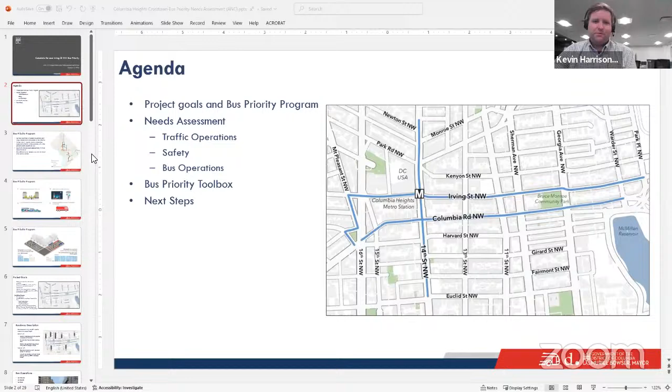But to start with, the bus priority program is something that has grown out of long range planning in the District of Columbia. moveDC, which is our long range transportation plan, identified many corridors within the district, about 70 miles altogether, where there's heavy transit ridership. My team's job is to implement projects that will make transit work better on all of those corridors to improve travel time and reliability.

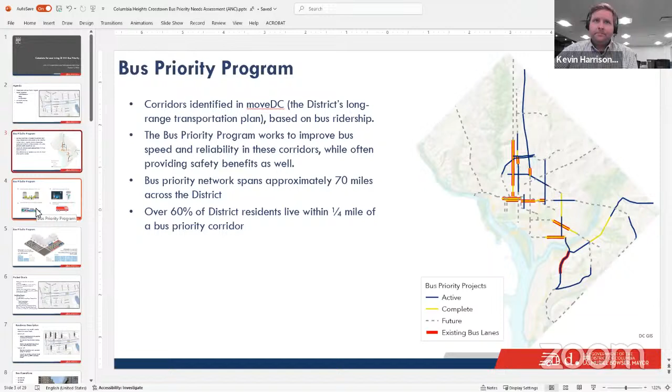And the reason we do this isn't just because we love buses. It's about helping the people who ride those buses so they can spend more time with their loved ones, spend less time waiting for the bus, travel and reach more destinations, make their life more convenient. And also, it can help emergency vehicles respond to emergencies.

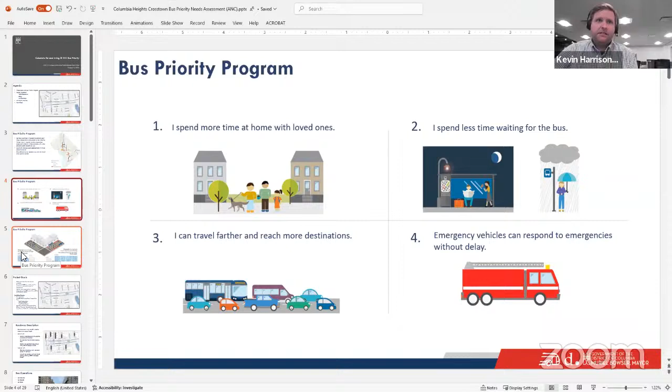Another element of this is that many of our streets are very congested and at capacity in terms of fitting cars. There are bus priority interventions we can do that allow a lot more people to move more freely and more conveniently. This is a way that we can get more out of our transportation system and provide affordability and convenience for residents.

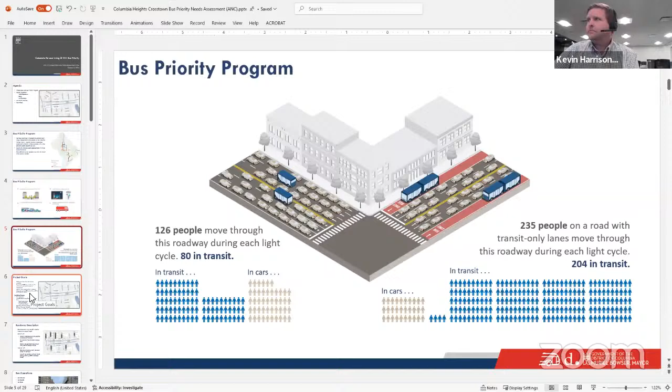Some of the main goals of this project are most notably to reduce bus travel time and improve reliability. We're focused on the bus priority element of this project. Another major part of it is evaluating the 14th Street bus priority project that was completed in 2020.

Work was done in that project in the first year of the pandemic, and it was difficult to evaluate for a long time because travel patterns had changed, and it was hard to know what was going to be happening in the future in terms of travel patterns. But now that traffic volumes have stabilized and returned to previous levels, we want to get further into evaluating that project and see how it's working.

The limits for the project are 14th Street and also Irving Street, from on the west end, Columbia Road, where buses start to make this connection over to Irving Street via Harvard Street and Mount Pleasant Street. We want to make sure that we cover that with this project as well.

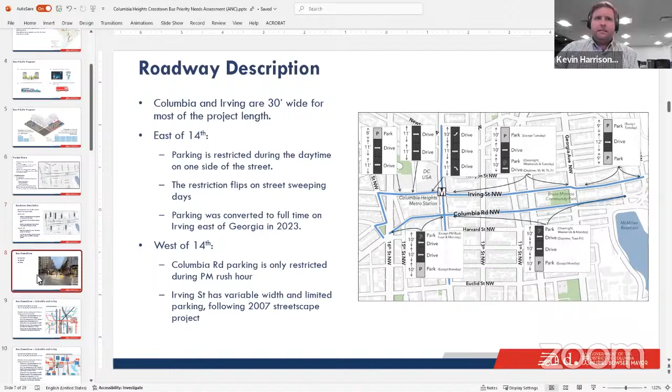And then switching gears to talk a little bit about some of the bus operations in the area. I wanted to talk some about the bus network, the bus speeds through the area, and then also some of the bus stops and bus stop locations.

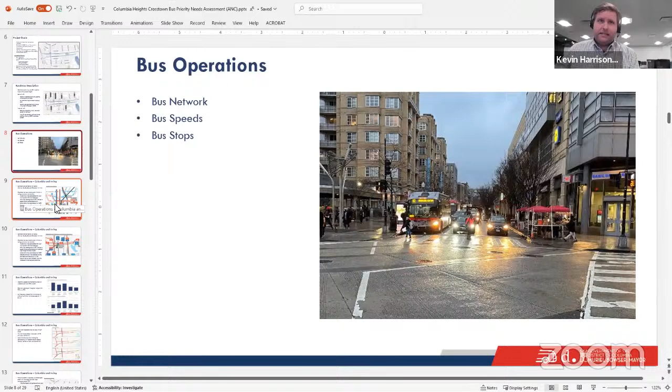With the network, one of the major things I wanted to touch on is the bus network redesign that's happening right now, that WMATA is leading, the Washington Metropolitan Area Transit Authority. It's not a DDOT project, but we're an important partner in that process. And just want to note that in this area, there are some changes to the bus network.

The H2 and the H4 are kind of the main routes that continue all the way down Irving and Columbia through this corridor. But then there are also segments that have the H8. The 42 and 43 make that jog on Harvard Street up to Mount Pleasant. And then, of course, the circulator, where the service is ending.

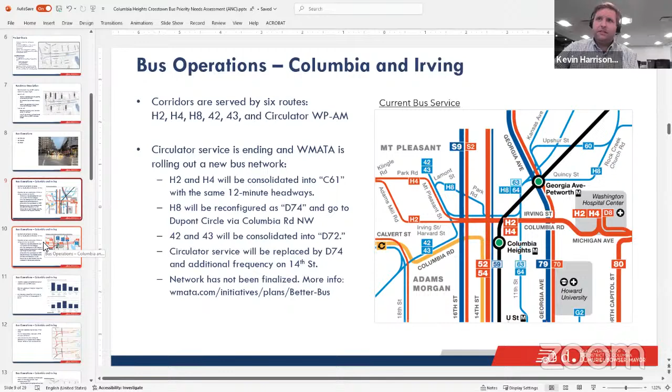So the H2 and H4, I'll switch over to just a snapshot of the new network. Also note that their network's not finalized, but right now this is what they're proposing to roll out in July of 2025. So the H2 and H4 are going to be consolidated into the C61, which will have about the same headways as it currently does.

The H8 will be reconfigured as the D74, and it's actually going to be extended to go from Brookland to Petworth, which the H8 currently does, and then it's going to continue down to Dupont Circle and Farragut Square via Columbia Road.

So the H8 is effectively going to just keep going west. It's not going to do the loop through Mount Pleasant anymore. It'll just go straight down Columbia and Irving.

The 42 and 43 are going to be consolidated into the D72. And then the circulator service will be replaced by that D74 that I mentioned. That'll provide service along Columbia Road into Columbia Heights, and also additional service on 14th Street.

And again, this is WMATA's plan. There's a URL here to learn more about what they're proposing, and I encourage everybody to stay engaged in that process.

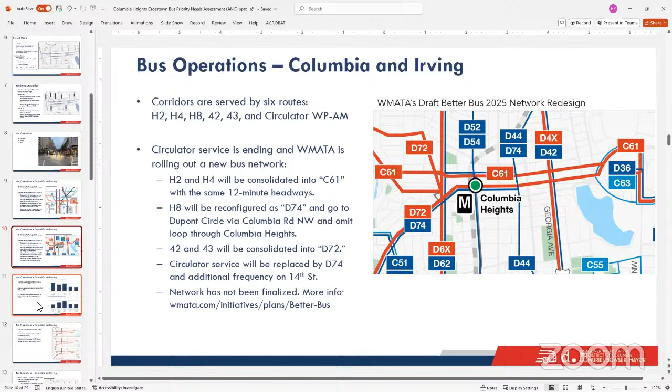Thanks, and I was just gonna try and move a little bit faster. I'm going very slowly, so my apologies. So I was gonna touch on the ridership.

It's generally higher where there's more service, west of 14th Street. And so you can kind of see here the different routes that serve the different segments of the corridors and how correspondingly the number of passengers on board buses tapers off as you move east. It ranges from about 700 to 1,700 passengers. Ridership on the WMATA routes is about 90% of where it was pre-pandemic.

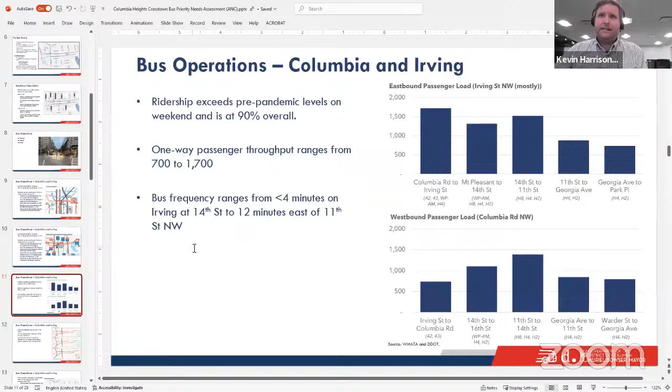And the frequency ranges from less than 4 minutes, so that's around Irving and 14th, there will be a bus every 4 minutes. But farther east on the corridor, it's every 12 minutes or so, where it's just the H2 and H4.

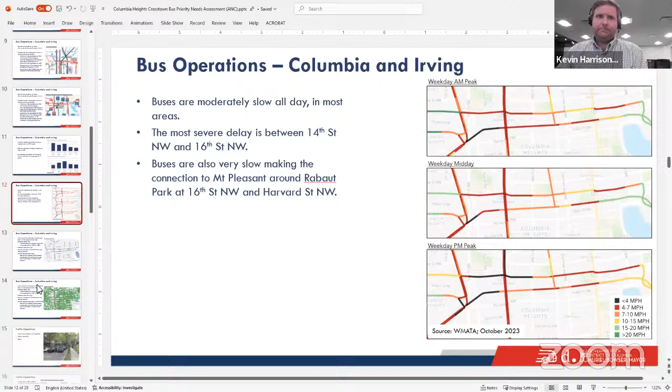WMATA's bus stop spacing guidelines and the preferred spacing for local bus service is 4 or 5 stops per mile, which works out to about 1,060 to 1,320 feet between bus stops.

The other thing I was going to point out is that almost all of the bus stops are on the near side of intersections. So the bus stops before it goes through the intersection as opposed to after, which we would call a far side stop.

Near side stops are generally slower, and they also make it impossible for us to use a technology called transit signal priority, which will extend the green time at a traffic signal for a bus if it's running late. The reason it doesn't work is because when a bus is stopped at the intersection serving the stop, it gives a false cue to the traffic signal that it's trying to get through the intersection. So it generally doesn't work if the bus stop is on the near side.

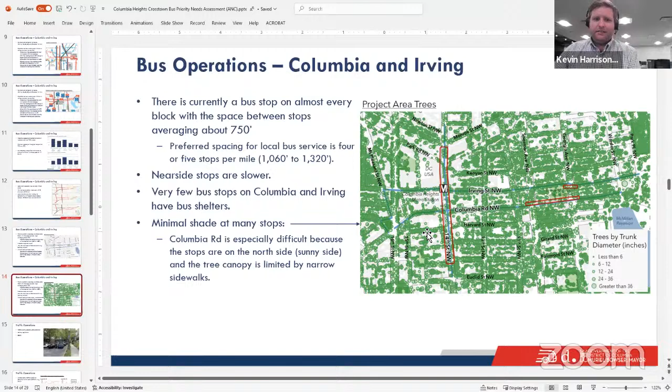So on Columbia Road, the stretch between Sherman and Georgia, where there's a bus stop on the near side of that Georgia and Columbia Road stop, is an area where there's not much shade due to the narrowness of the sidewalks and the condition of the trees. And then also at Irving and Georgia Avenue.

On Columbia, it's particularly acute because the bus stops are on the north side of the street, so the sun really shines down on them.

And then on 14th Street, there actually are trees through most of that area, but they haven't been able to grow very large. In talking to arborists, it sounds like it's a function of lots of foot traffic and things damaging the trees and making it hard for them to really grow and do well.

And I'll just want to pause you there for just a second. I guess Commissioner Footer, Commissioner Brown, do you have any questions about what's been presented so far?

I would just say, no, I don't have any questions, but I would agree with this analysis that there is definitely less shade at the points you presented, and less shade from trees, but also shade from the bus shelters. So I would just agree with that analysis.

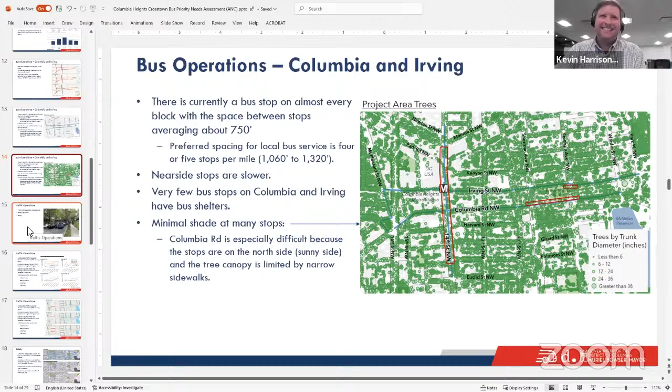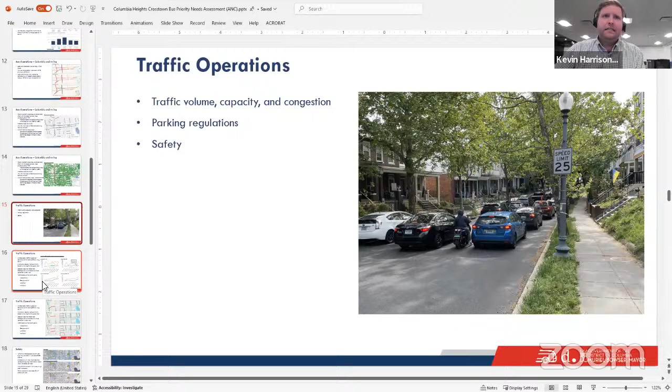So I was going to talk now a little bit about traffic operations. This may be a familiar photo of Columbia Road, approaching Georgia Avenue. So this graphic is very technical.

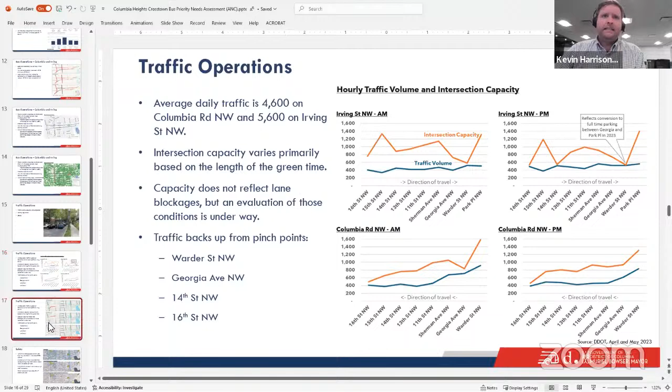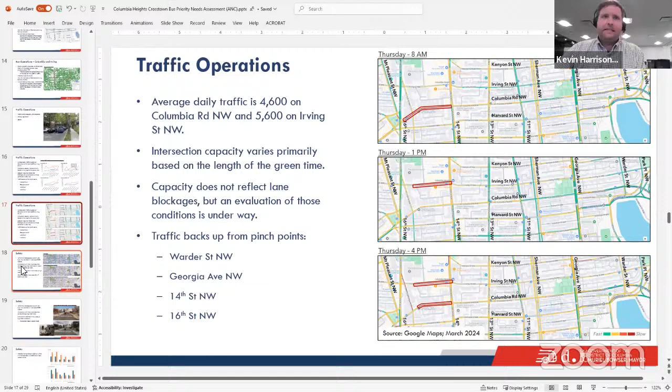Pivoting to safety - Georgia Avenue and 14th Street are on the high injury corridors in the Vision Zero 2022 update. Correspondingly, the highest crash intersections on Irving and Columbia are at those two streets, along with 16th Street, where there are about 12 to 18 crashes per year according to police reports. At the other intersections, it's about 3 to 7 crashes per year.

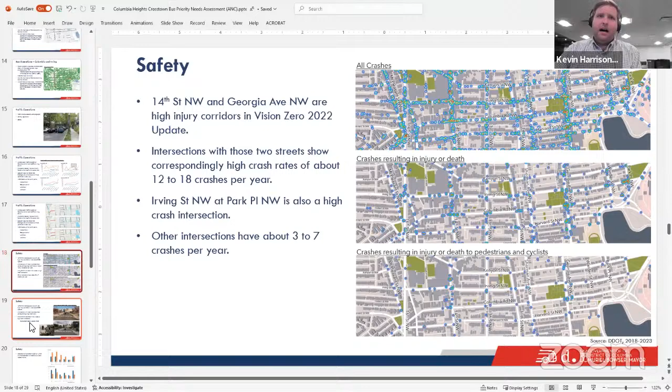I'll also note that Irving and Park Place Northwest is also a high injury intersection, or was historically - that's over here on the right, where you can see this collection of dots. That caught my attention, and I thought it was interesting that in 2022 DDOT actually installed these retro-reflective backplates on the traffic signals and the mast arm to make the signal more visible, which has had a big reduction on crashes.

A lot of the severe crashes in particular are right angle crashes, where most commonly somebody was distracted and ran a red light, resulting in a severe crash when they run into each other at a right angle.

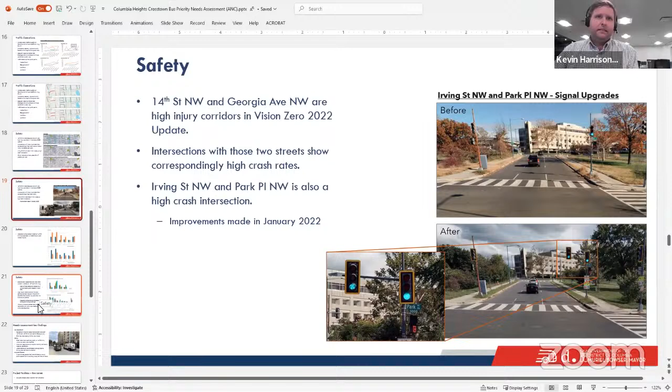So talking a little bit about the nature of the crashes that happen on 14th Street, Irving Street, and Columbia Road - this graph on top shows the percentage of crashes by user type. The blue bar is 14th Street north of Irving, so that's from Irving to Newton Street, the north end of the 14th Street corridor we're studying. The orange bar is 14th Street south of Irving, so Euclid to Irving, and then Columbia Road in green and Irving Street in blue.

On 14th Street, on that north end near DC USA, the most common road user involved in crashes is bicyclists, followed by pedestrians if you look at the other tall, dark blue bar. Whereas on Columbia and Irving, the person most commonly injured in crashes is the driver on Columbia Road or a passenger in the car on Columbia Road. There are still also a very large percentage of bicyclists and pedestrians injured.

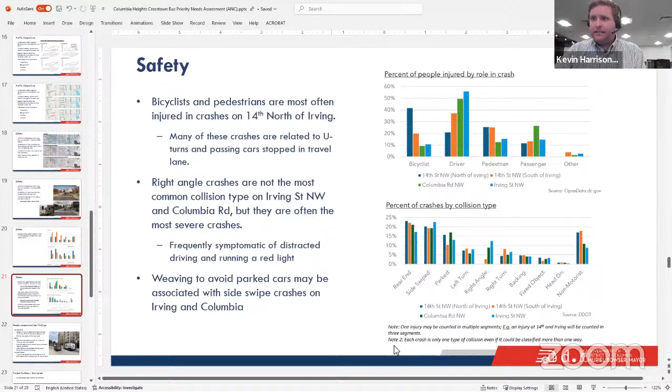One last thing I was going to note on the crash data is we've been looking at the historical trends over time on 14th Street and noting that there was about a 54% reduction in crashes on 14th Street south of Irving, which is where there is a bus lane. So this orange bar is the part of 14th Street with a bus lane, and that was installed in 2020.

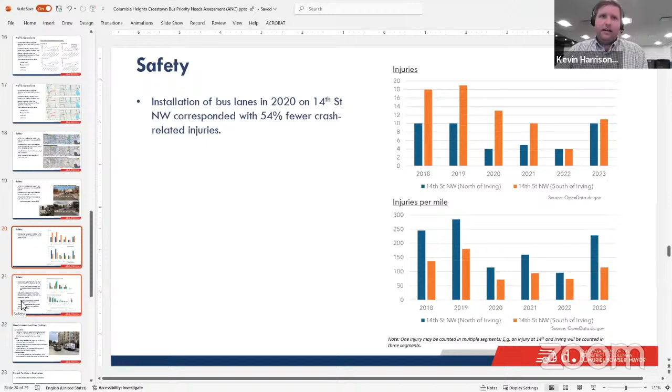You can see there was a reduction in the following years of about 54%. This fits into the element of the project where we're trying to evaluate the 14th Street project, and there will be more to come in the coming weeks about that, because we're also looking at bus speed and lots of other characteristics of that project.

So the key takeaways from our perspective on this needs assessment is that congestion is slowing buses most severely between 14th and 16th. The short stop spacing is further slowing down buses. Crash rates have declined greatly on 14th Street. There are opportunities to improve visibility and clarify roadway operations on Irving and Columbia in particular. Unsafe behaviors like distracted and aggressive driving may be contributing to many of these crashes.

And lastly, in regards to enjoyable spaces, in some areas people feel uncomfortable or avoid public spaces due to crowding, noise, and lack of shade. That was one that I didn't really get into in the previous slides, but it's something that's coming out of the Office of Planning public life and vending study that's particularly focused on Columbia Heights. And I know that you guys are generally a little farther east.

So I was going to move on and just talk about a few of the items in our bus priority toolbox. We've got just a few more slides left.

One thing that I feel like is missing from these slides, and I'm sure you're going to do this during some of your communication, but I think it's really helpful to emphasize the amount of ridership these buses have and the number of people that get around the area without a personal vehicle. My recollection from one of the Northwest boundary studies, released in 2022, is that 75.5% of people in this area commute outside of a personal vehicle, so I think that's good to note. I think it's also helpful to note that it's like 40% of households do not have access to a car. So there are a lot of folks that need this type of access, and it's fair to figure out ways to make buses go faster given the number of people that are using them.

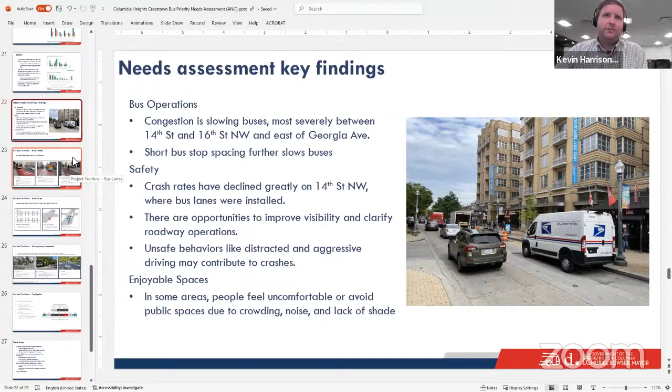Yeah, I appreciate that. And I kind of go back and forth on knowing that the bus is serving people well beyond the neighborhood, and sort of how to incorporate neighborhood data like that is always a decision that we make. But yeah, that's a good suggestion though, and I'll probably incorporate that in future presentations.

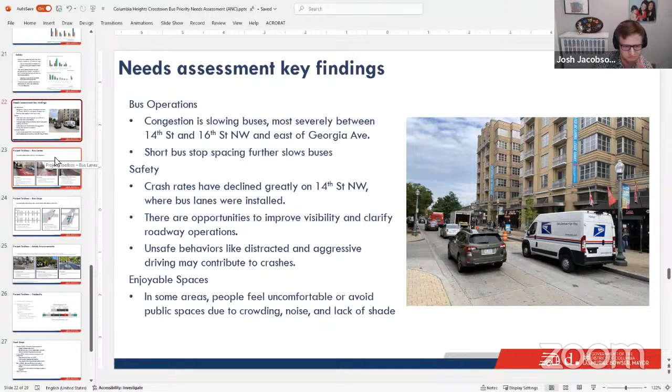In terms of the toolkit, I think all of us are probably pretty familiar with the different options. So if you just want to give us some highlights of the options you're considering, I think we mostly understand them.

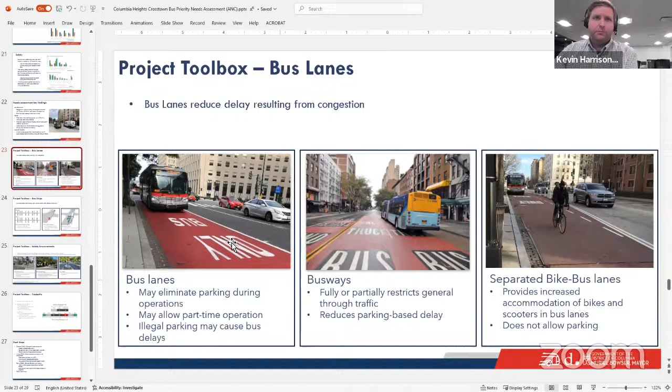There's bus lanes, which you'll have seen many places in the city and the neighborhood. Another item that doesn't exist in DC yet is the busway, where we would fully or partially restrict general through traffic. This is one of the strongest interventions we can make to potentially expand the pedestrian realm and move buses more efficiently. That's something we'll be looking at for this project.

Then there's bus stop rebalancing, which you may also be familiar with, looking at the spacing between bus stops and making it more even. Bus stop relocation, generally moving them to the far side of intersections, and then queue jumps.

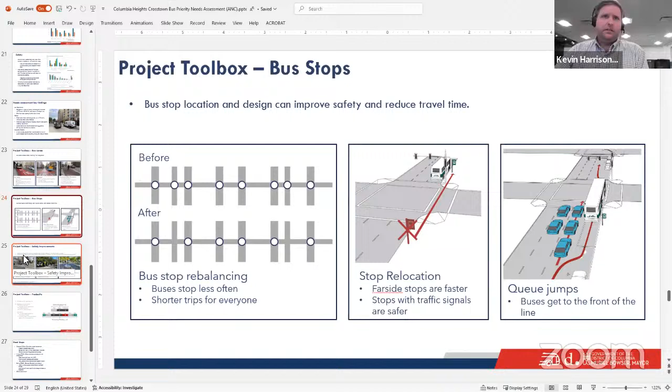Stop me if you're not familiar or have questions, but I'll go through them quickly. Curb extensions improve visibility at crosswalks, median refuges do the same and simplify a pedestrian's decision by only crossing one direction of traffic at a time.

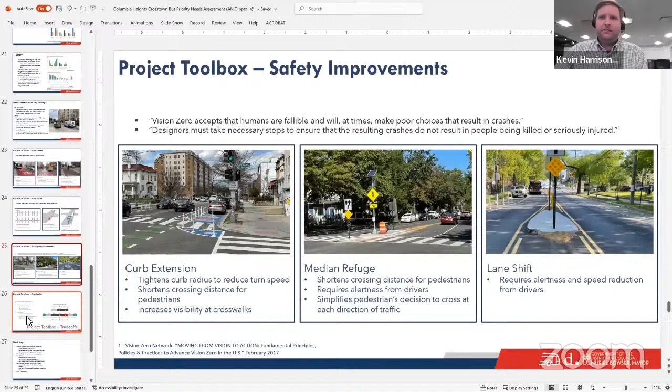There's also lane shifts, which ensure drivers are alert and reduce their speed to negotiate that. The other thing is there's a lot in the toolbox, but the street is only 30 feet wide, so there's just not room to fit everything. We have to make decisions about what's most important.

We may not be able to fit parking everywhere. One way they're trying to balance the desire to mitigate congestion and provide parking is by having a lane serve both functions. So maybe that daytime parking restriction would be something that could change.

Also access restrictions, not allowing cars in some areas, and then block by block design, thinking about what's most important to have in different places. Generally, the constraints will be around making sure we can continue to accommodate commercial loading and access, and also achieve those project goals outlined in the earlier slides.

The next steps for this project: this month we're focused on the community outreach aspect of the needs assessment. We'll meet with the area ANCs and other key stakeholders in the corridor we've identified so far. We'll also be walking the corridor, hanging up posters at bus stops, and talking to residents.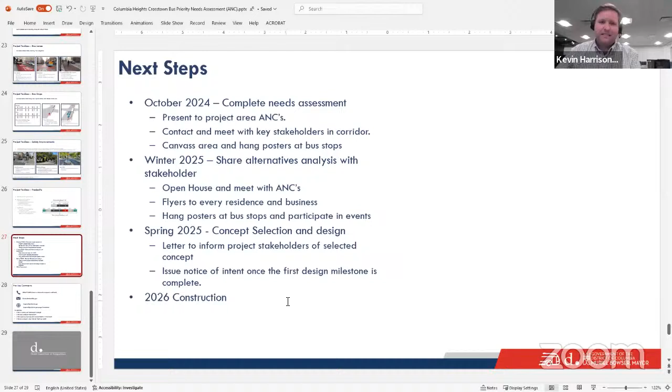Sorry, is that winter of 2024? It says winter of 2025. So that's like a few months from now, winter of 2025. I guess winter starts December 21st, so January, February, that range. Oh okay, I guess it's just weird because I think of it as the end of the year, but it's mostly at the beginning of the year. Yeah, okay, that's fair.

Here's my contact information. We have a project website that we'll be adding more content to over the coming months. If you fill out the survey there, you can get on the distribution list for project updates when new materials are posted or there's any news on the project.

Awesome, well thank you so much for the presentation. I'll let you drink more water while we wait.

I had a question about the busway, but I'm going to let Commissioner Footer go first because I see that he has his hand raised. Thank you — if you could go back to slide 26 real quick.

So for the 30 feet, and this is exactly what we're seeing in the area that impacts 1E, what's the criteria you guys will use in the decision-making process to determine whether a dedicated bike lane is the piece you want to use in your arsenal versus some of the other things in the toolbox?

So generally speaking, Columbia and Irving are not, for the most part, particularly in the eastern end, part of the bike priority network.

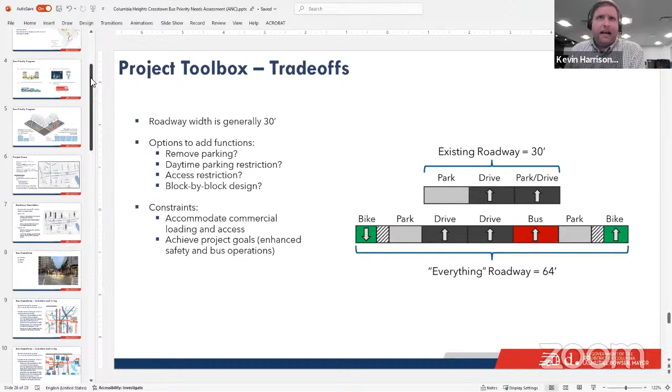And it'll change with the expansion at the McMillan. As part of the McMillan expansion, they're going to be adding some space for clinics and things in support of the hospital. That's good to know, I wasn't fully aware of that, that it's to build the capacity of the hospital center.

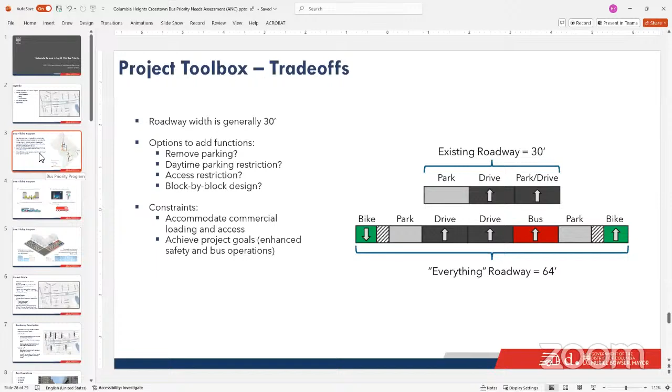So a study was done. I would work internally to find out where that study is, so you can look to that data. It was already done, looking ahead as a result of the development of the hospital center's side, which is the last phase of the McMillan project development. Okay, I'll check into that.

And then there was also a study done like 12 years ago or so that focused on the shuttles, which I've been able to review, but that's obviously pretty outdated at this point. I'm not sure if you were here when I talked about some of the foundational planning, but that crosstown multimodal study - I was at DDOT when it was finishing up. I wasn't personally involved, but I know it was major, there was a lot of community outreach that happened, people spent a lot of time giving feedback and attending meetings and workshops. So definitely don't want to throw that out.

Good, yeah, there's some design options that were influenced by the community that I would love to revisit through this committee. Great, sounds good. Maybe I can follow up with you at some point and get more specific about some of the design recommendations you were thinking about.

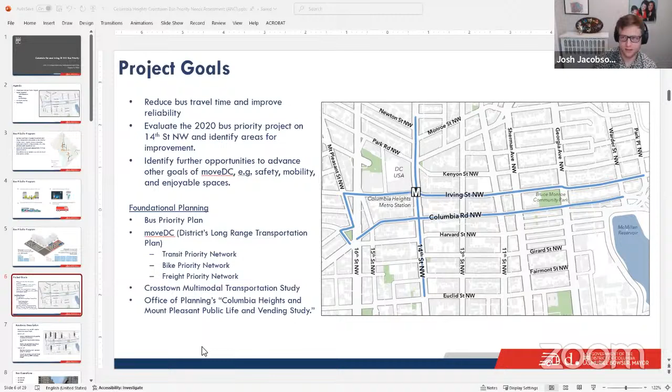Thank you, Commissioner Brown. I guess, Mr. Harrison, what questions do you have for us that we didn't already help you answer, or what feedback are you looking for from us?

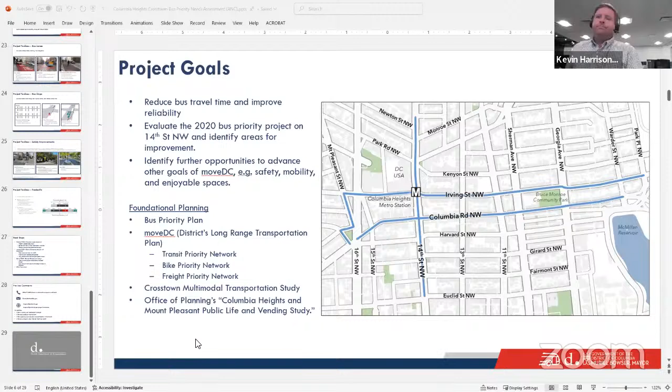I would only ask that people get online and fill out the survey if you guys can connect with people through your channels. The big thing at this point is we'd like to start growing our contact list. Not everybody's going to be interested in providing open-ended feedback on safety concerns and things in the corridor, which is what we're looking for right now. But when we start proposing alternatives, where people will have something to respond to and where there will be stronger interest, we want a good contact list so we can count on getting a good amount of feedback and good response.

And then also, you don't have to do it now, but if you have ideas or thoughts, this is the ground floor for the project. So don't hesitate to let me know right now, or if you want to talk in the future, send me an email or anything like that. I welcome any feedback, any ideas, any thoughts.